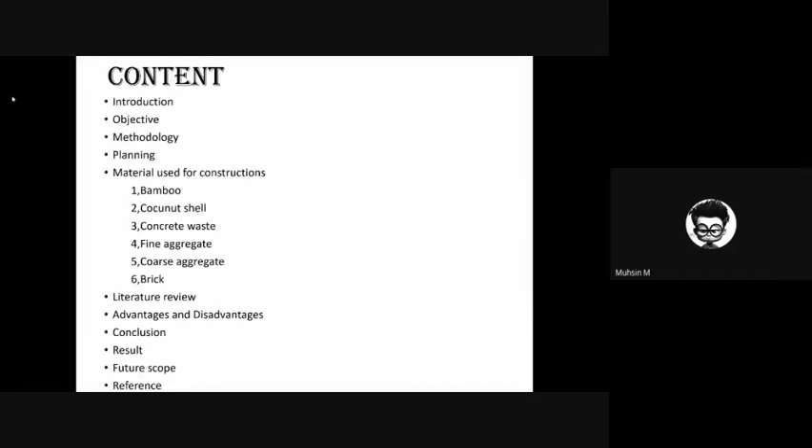Our main aim is to create a most cost-efficient, durable, and eco-friendly building. In modern times, we are mostly using the conventional method, where the cost of construction and building materials are high. To avoid this factor, we are using some...

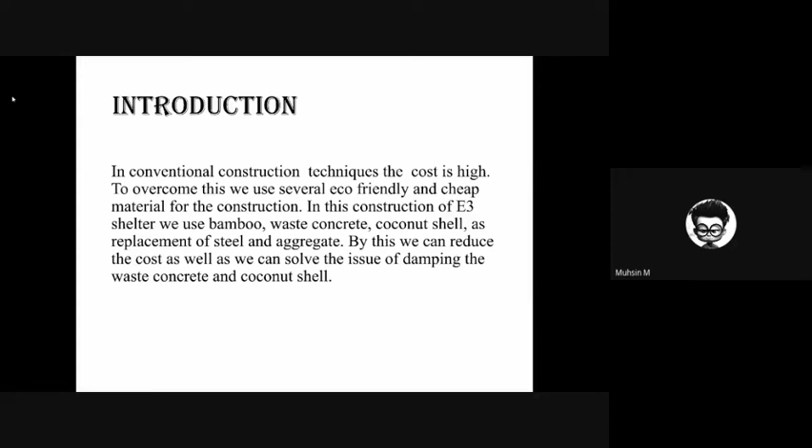eco-friendly and biodegradable materials such as bamboo, waste concrete, and coconut shell. In the current scenario, the use of plastic materials and waste materials is increasing. To avoid this increase, we are using some natural and biodegradable materials.

Our main objective is to plan, design, and construct an eco-friendly building which is economic and energy efficient.

Our methodology: firstly, we are planning about the construction and the materials required. Then designing, which means designing the structure, calculating the load, and the shape, structure, and size of the columns and beams and slabs. Next is the collection of materials.

In our eco-friendly and economic building shelter, we are using coconut shell and bamboo as reinforcement and aggregate. So we are collecting this material, then cleaning it to give it strength. Then we find the mix proportion that gives the highest strength. Then casting our structures, columns and beams, and curing for 28 days to get maximum strength. Then wall construction for covering four sides, and finally roofing and plastering.

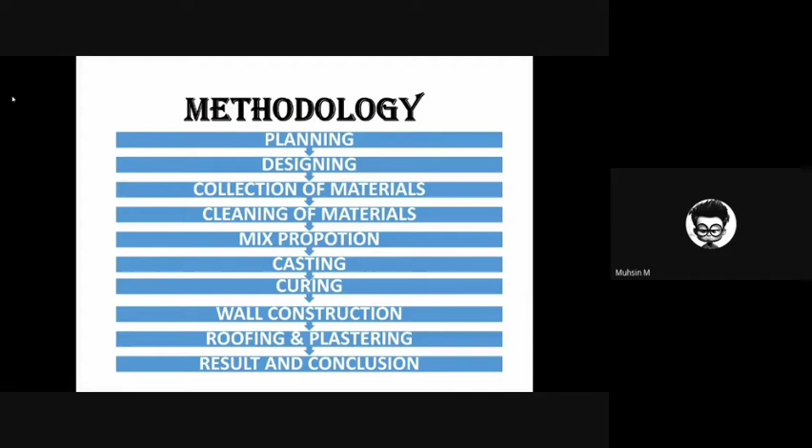Planning: the current scenario is increasing the quantity of waste material. We are using the use-and-throw concept of consumerism. The main part is cost effectiveness and durability, which means long lasting and suitability.

Here we are using bamboo as the reinforcement and coconut as the aggregate, mainly for the strength and local availability of the materials. These shelters are eco-friendly, with innovative designs and methods of construction that are mostly economic and eco-friendly.

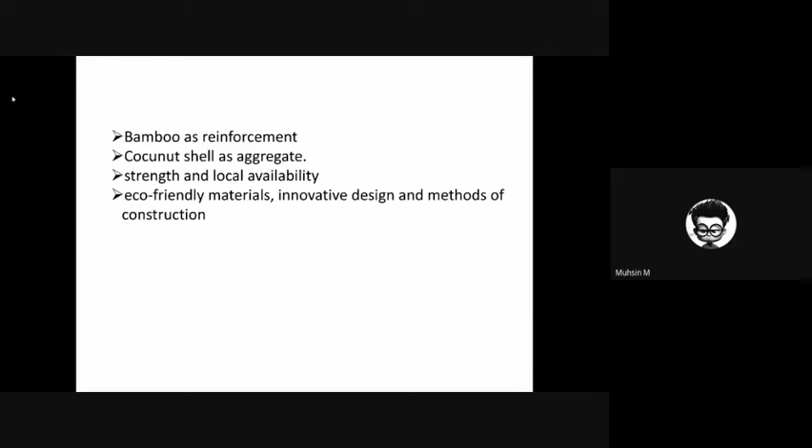Then there are different components we are using for the E3 shelter. The first one is the slab. The size of the slab is 4.1 meter by 4.1 meter, a square shaped structure. Thickness is 150 mm. A 10 mm diameter bamboo is provided with a spacing of 80 mm.

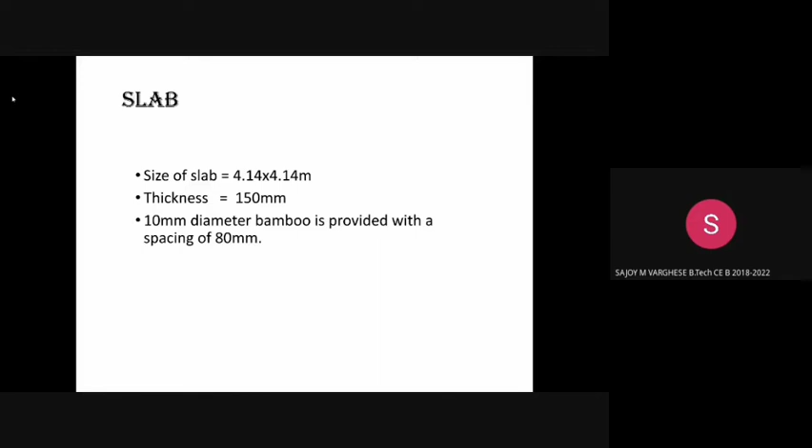Next component is the beam. The total load acting on the beam is 32 kilonewton. The span of the beam we are taking is 4 meter. The size of the beam is 225 by 250 mm. The reinforcement is 3 bars of 16 mm diameter at the tension zone and 2 bars of 10 mm diameter at the compression zone.

The column: the total load acting on the column is 49 kilonewton. The size of the column we are using is 225 by 225 mm. The reinforcement is 4 bars of 12 mm diameter at the corners. The tie is 5 mm diameter tie at 180 mm center to center.

We are creating an E3 shelter in square shape. Its length by breadth by height is 4 meter by 4 meter by 3 meter. Bricks of size 19 by 9 by 9 are used for the wall of the E3 shelter.

The foundation of E3 shelter: first there are 4 points. First is selection of site. There is no specific criteria followed in the selection of the site for construction. The leveling before the excavation process - we want to make sure there is no scope for vegetation and brushwood and stumps of shade trees, etc.

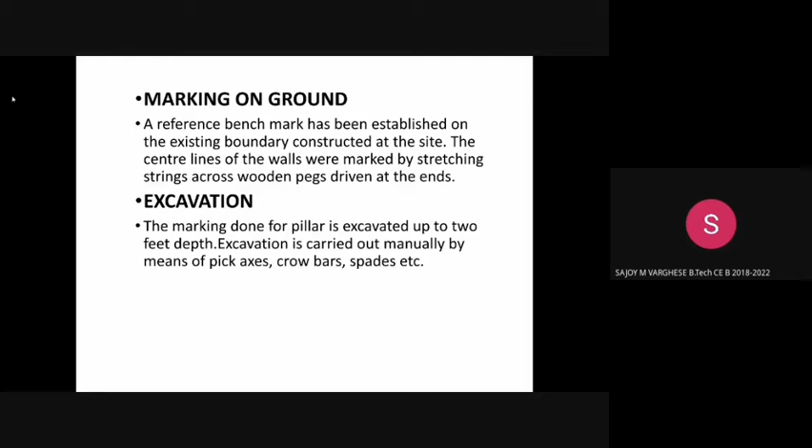Marking on the ground: before excavation, we should mark the areas we want to dig up, using plumb wooden pegs driven into the ends. We should mark that. Excavation: the marking done for the pillars is excavated up to 2 feet depth. Excavation is carried out manually using pickaxes, crowbars, etc.

Next, the wall construction, where walls are constructed using bricks vertically and proper dimensions are maintained. The length is 400 centimeter, height is 300 centimeter, and width we are using is 20 centimeter. The type of cement used is OPC cement.

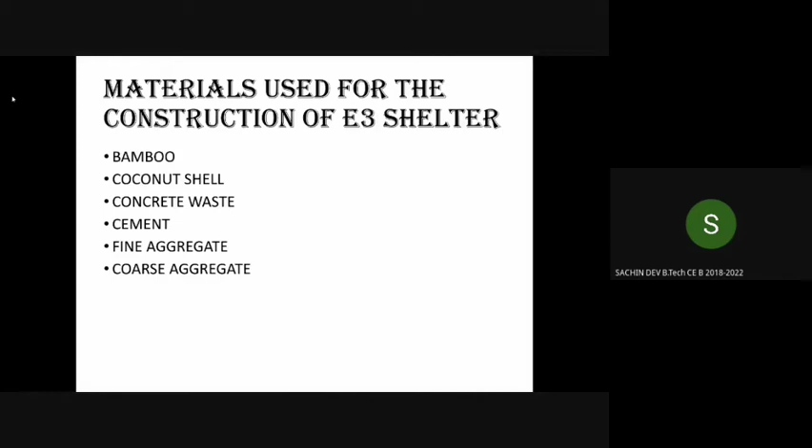The materials used for construction of E3 shelters are bamboo, coconut shell, concrete waste, cement, fine aggregate, and coarse aggregate. The first one is bamboo. We use bamboo as a replacement for steel. Bamboo shows similar properties to that of steel. While using bamboo, we only use bamboo showing a pronounced brown color, which ensures that the bamboo is at least 3 years old.

The size of the bamboo should be less than 2 centimeter, and it should be seasoned bamboo. For seasoning, the bamboo is kept under the sun for about 4 weeks, and the bamboo is provided with waterproof coating. The bamboo provides a tensile strength of 370 MPa.

The next material is coconut shell. We use coconut shell as a partial replacement of coarse aggregate for making the concrete. We replace about 30% of coarse aggregate with coconut shell. For the 30% replacement, about 10.8% of cement is additionally added to the concrete.

The coconut shell is dried under sunlight for about 30 days, then broken into small pieces of size 5 mm to 20 mm. It is again dried under sunlight for about 30 days, and then submerged in water for about 24 hours before it is used for the preparation of concrete.

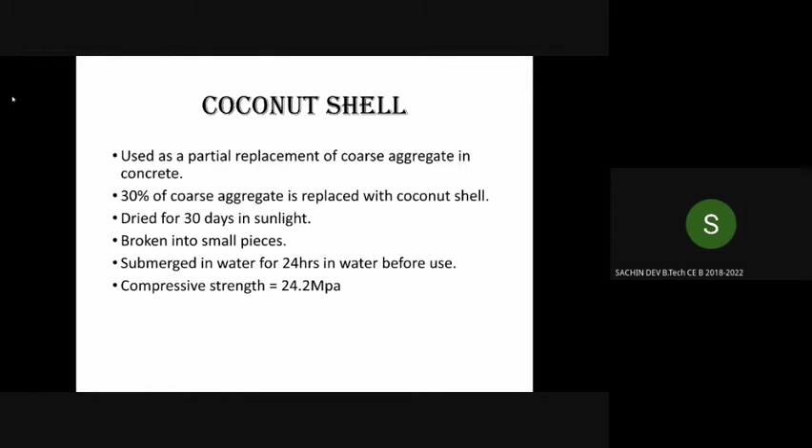While we replace 30% of the coarse aggregate with coconut shell, the density of the concrete decreases by 7.5%, and the coconut shell concrete provides a compressive strength of 24.2 MPa.

The next material is concrete waste, used as a partial replacement of coarse and fine aggregate. About 30% of the coarse and fine aggregate is replaced by concrete waste. The crushed concrete waste is used as coarse aggregate, and the powdered form is used as fine aggregate. The water absorption of concrete waste is higher, but its specific gravity is low. The compressive strength is approximately the same as that of concrete produced with normal aggregates.

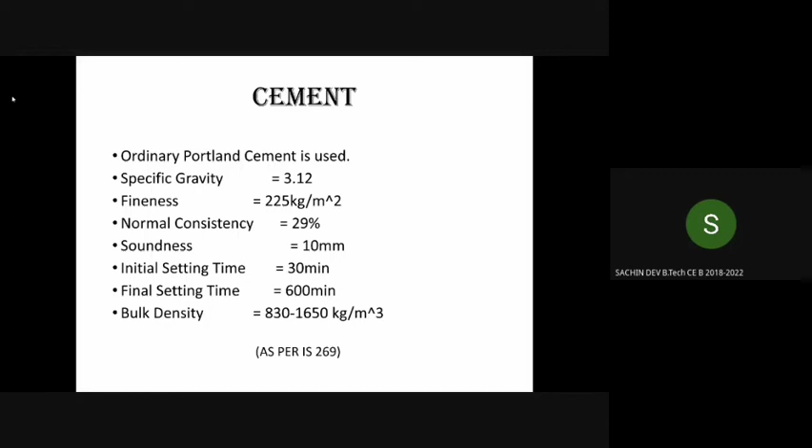Next, we use ordinary Portland cement for our construction purpose. As per IS 269, the properties of ordinary Portland cement are: a specific gravity of 3.12, and a fineness of 225 kilogram per meter square. The normal consistency of the cement is 29%, and it provides a maximum soundness of 10 mm. The initial setting time of the cement is 30 minutes, and its final setting time is 600 minutes. The cement has a bulk density of 830 to 1650 kilogram per meter cube.

Next is fine aggregate. We use manufactured sand, M sand, as fine aggregate. M sand has a specific gravity of 2.68, and a fineness modulus of 5.2. It has a water absorption of 7%, and provides a smooth texture.

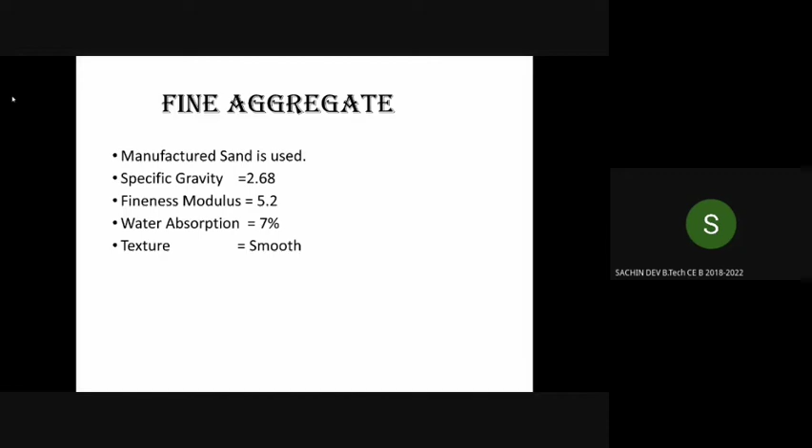The coarse aggregate we used is 20 mm in size, with a specific gravity of 2.7 and a fineness modulus of 7.15. Water absorption of the coarse aggregate is 8%, with an impact value of 8.5% and crushing value of 18.5%. We use angular shaped coarse aggregate for our construction purpose.

Next is mild steel. The mild steel we use has a specific gravity of 7.8, and the yield stress of the mild steel is 250 MPa. It is malleable and ductile, and strong in tension and compression.

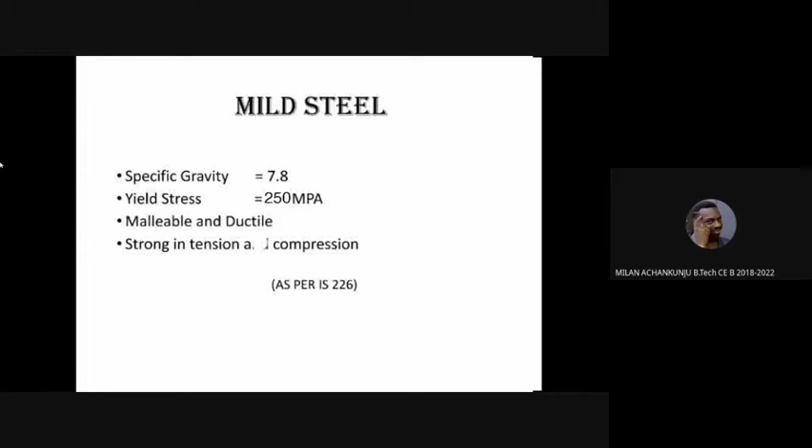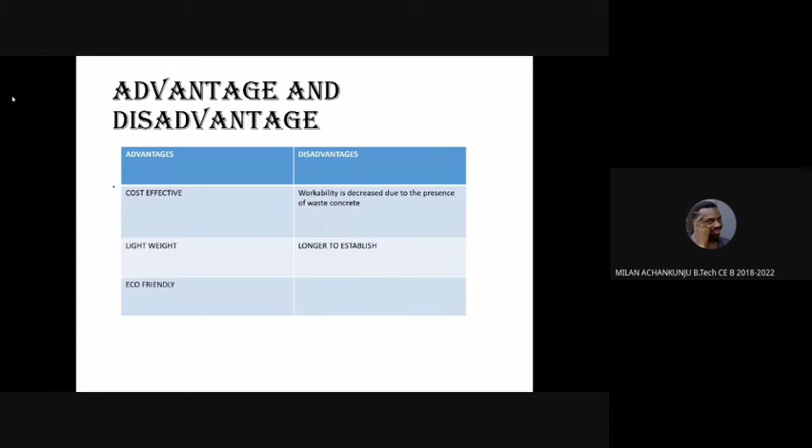Next, Milan will conclude the topic. The advantages and disadvantages: the advantage is it's mostly cost efficient, light in weight, and eco-friendly because of using eco-friendly materials such as coconut shell, bamboo, and waste concrete. The disadvantage is that workability is decreased due to the presence of waste concrete, and it takes a longer time to set.

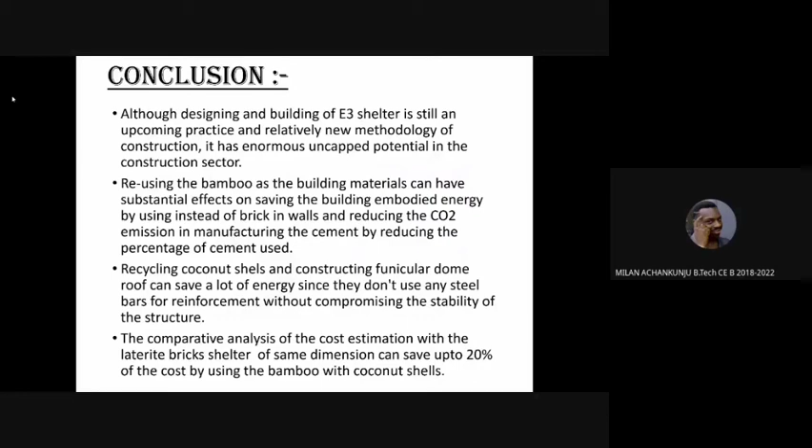Compared with a cost analysis for a shelter of the same dimensions using conventional materials, about 20% of the cost can be saved by using bamboo and coconut shells. The result shows that the execution and experience of this project with bamboo, coconut shell, and waste concrete can be effectively utilized for building shelters without compromising strength, durability, hygiene, and aesthetics, and without any reinforcement bars.

The future scope is that it can be built up to a longer span, and designed and tested. The plan, design, and estimation for longer spans can also be done for these types of construction because it is low in cost. So we are ending our presentation, thank you and have a nice day.